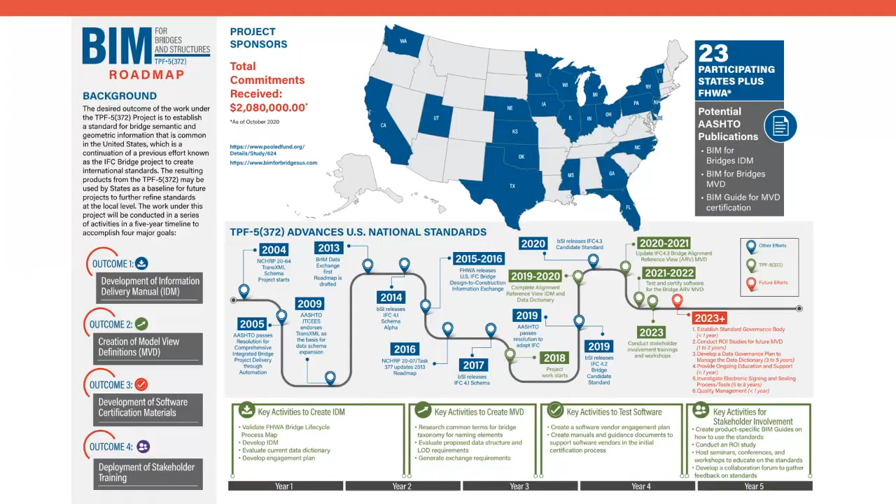Our goal for 2021 is to complete the Information Delivery Manual, IDM, and Model View Definition, MVD, for common bridges. Coordinate with the IFC 4.3 infra extension project, provide software vendors with testing materials, and finally begin the return on investment study. Next.

Working with AASHTO committees, we anticipate balloting the IDM and MVD for the design to construction exchange in 2022. I'm happy to say that we have been working with the National Steel Bridge Alliance, AASHTO Collaboration Group, TG15, to produce an IDM for the data exchange from design to fabrication.

That's the end of my presentation. Thank you.

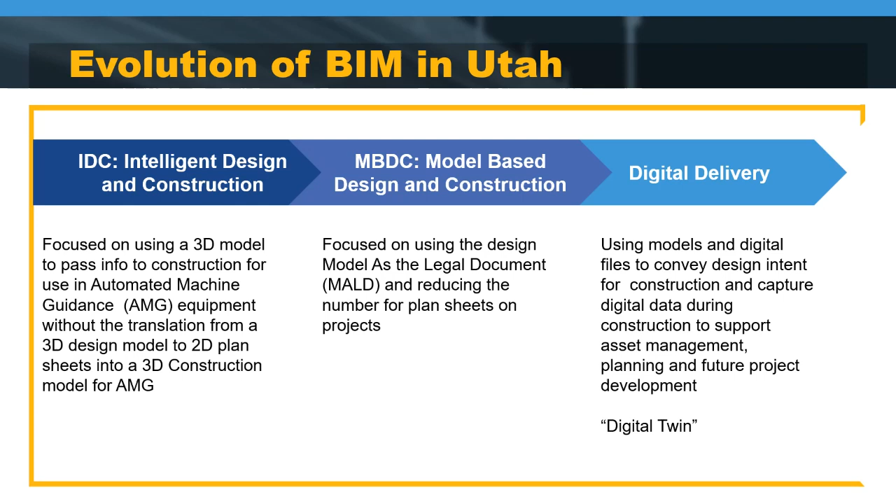To date, we have awarded 14 projects with the model as a legal document. 5 of those have been CMGC, where the contractor sits in on the pre-construction side to help us address the risk of the model being the legal document. 9 of them have been bid-build, and on all of those projects we're using rovers in the field and mobile devices for the civil features. 9 of those projects are fully constructed, and of those, 7 were awarded without cutting any sheets.

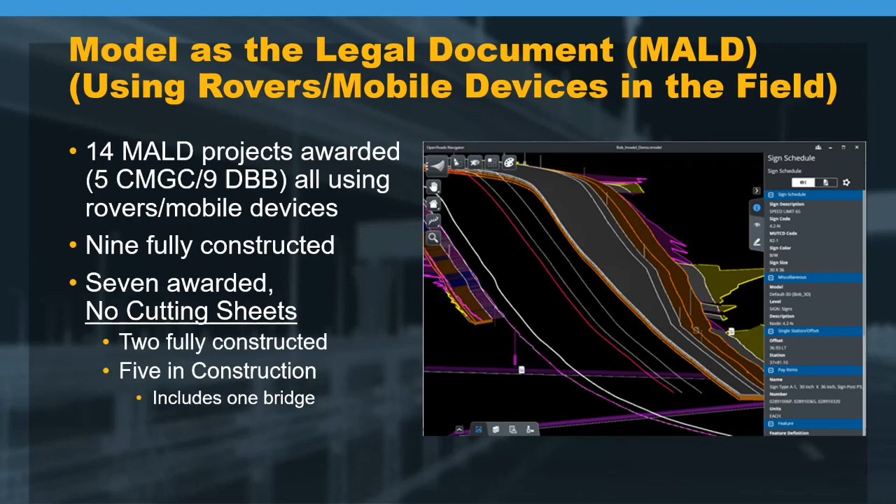So we're not putting out a plan set for the most part. 2 of those are fully constructed, and 5 are in construction right now as two-season projects.

We are trying, and I think we're right there, to build a repeatable process where we have a workspace for Open Roads Designer. We're adding metadata to signs, striping, guardrail, and barrier, and transferring information from design to construction. We're looking at having a consistent naming convention for everything. We've got links in individual assets that allow the person in the field to see the information, attachments, and standard attributes on almost all of our items now. We're doing CAD to GIS, with validation of our CAD standards and the ability to have a GIS workflow on every single project.

So we have an aid grant that we were awarded for $1 million, and on that grant we have a large team of consultants and contractors. We have Kimley-Horn, Horrocks, HDR, Avenue, Lochner, and Michael Baker, and on our contractor side, we've got Clyde and Wadsworth. We've got committees that consist of UDOT, internal consultants and contractors.

We've had a lot of vendor involvement, namely Bentley, Autodesk, Esri, Trimble, and Bluebeam. We have developed a model development standards manual that is out on our website. With EDC 6, we have a heavy involvement with digital as-builts.

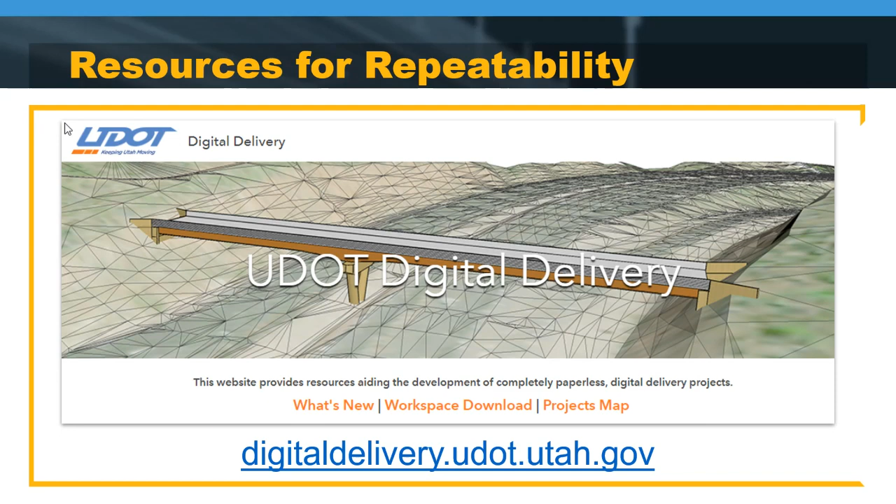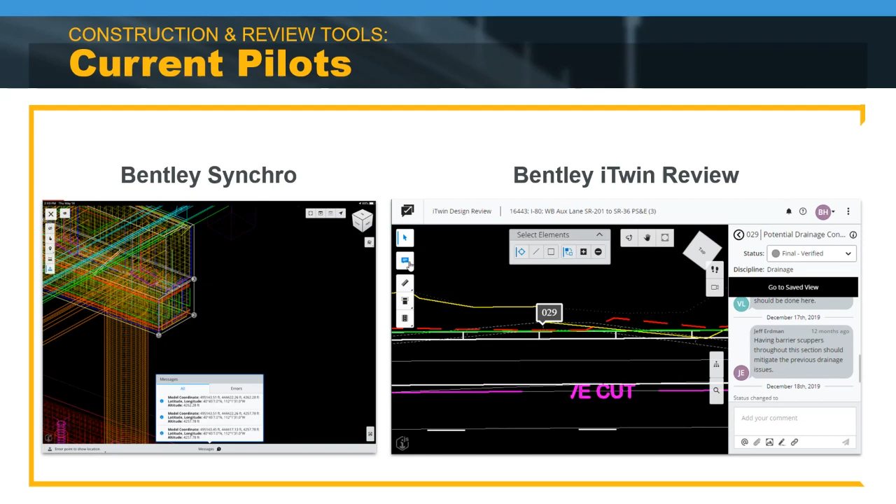So the vision for the future: we're essentially looking at tools in the second generation. Bentley Synchro is one of them, and it's live on a project right now. We're also using Bentley iTwin Review, for review at Plan in Hand and PS&E.

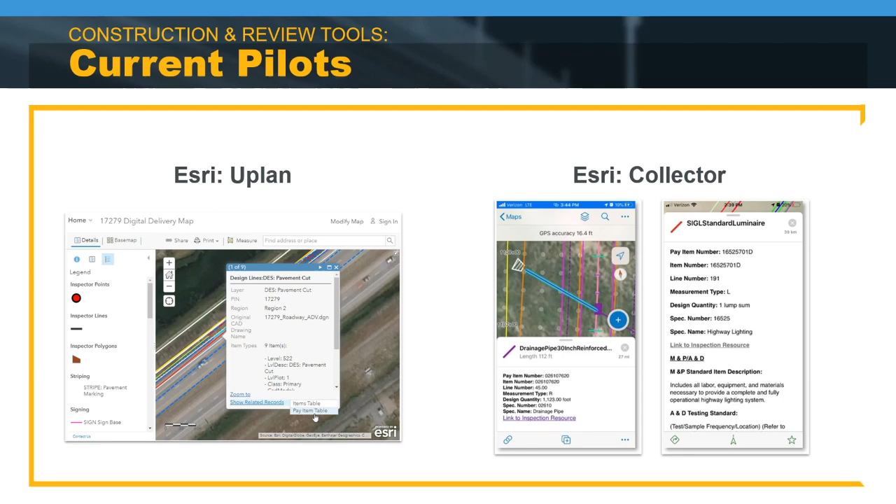We're using Esri products. These are screenshots of live projects that we're using in the field. We're using Collector to write information to our databases. It gives people in the field all the information they need.

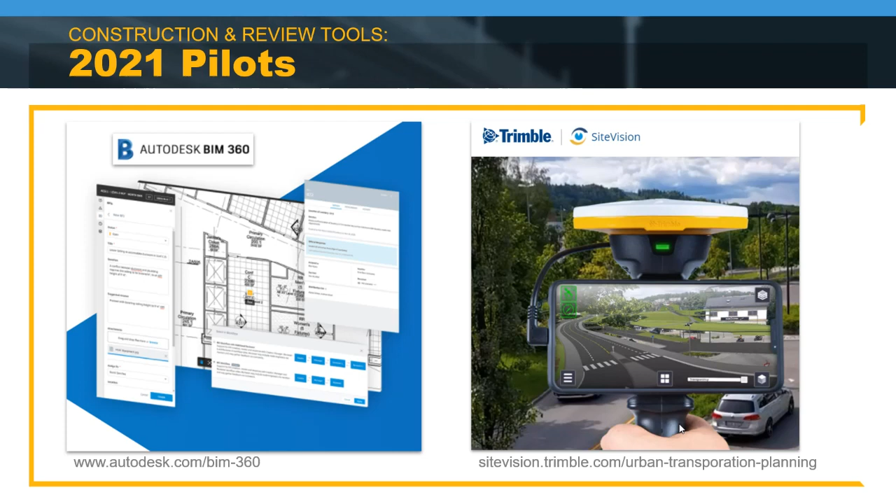We're also piloting Autodesk projects on their BIM 360 platform. We'd like to get to the point where it doesn't matter what you use, we just need the data flow, and that's what we are piloting right now with Autodesk. We're also piloting Trimble products, both their Site Vision and Quadri, and we expect to see those coming soon.

Our challenges are the tools are still in their infancy, even with the second generation. Our Esri products are not 3D and they don't meet all our needs. They're disconnected. Volume calculations are a struggle, and so is data integration. Our crews are not asking to go back to paper products, but they are saying that we're throwing a lot of tools at them, and it would be great if we just gave them one tool to work with. We're also concerned about the costs and licensing, so that's going to be an issue.

For more information, go to our website, digitaldelivery.udot.utah.gov. And from there, I'm going to hand that off to, I believe it's Ahmed.

Yeah, this is Ahmed Abu-Hawash again. In this segment of this webinar, I will discuss Iowa's perspective on digital delivery. As Mike mentioned earlier, Iowa DOT has a long history of providing digital models on highway construction projects.

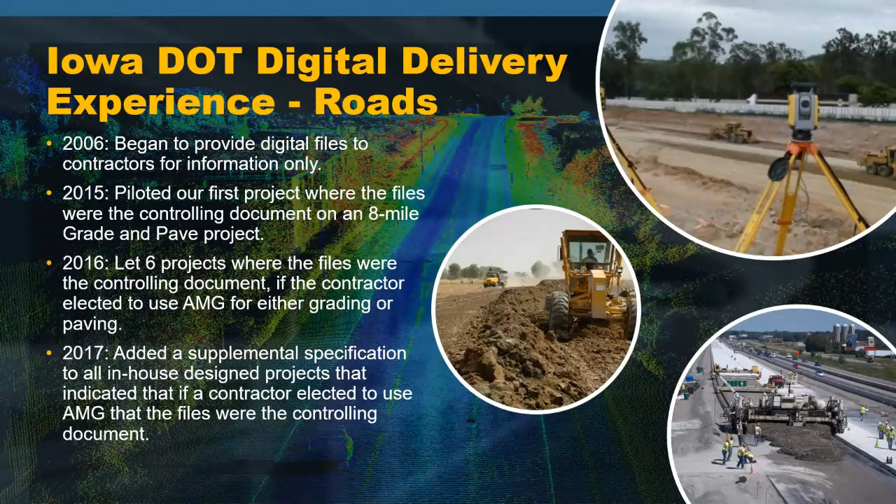As early as 2006, we provided contractors digital files for information only. In 2015, we piloted the first grade and pave project with digital files as the controlling document. In 2016, we let 6 more projects where we issued digital files as the controlling documents if the contractor chose to use automated machine guidance for either grading or paving. And in 2017, digital files became the controlling document on all in-house developed projects if AMG is used by the contractor.

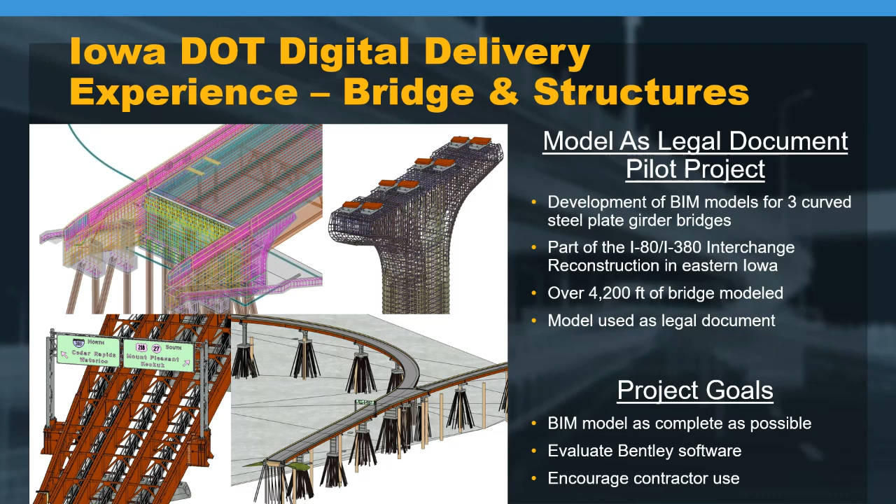On the bridges and structures side, we piloted our first BIM project with model as the legal document in 2018. The demonstration project is located at a major interchange in eastern Iowa. It included 3 curved steel bridges with a total length of 4,200 feet. Our goal was to develop the BIM model as complete as possible with the given software. We wanted to evaluate software and identify advantages and disadvantages of each, and also encourage contractors' use. We wanted contractors to become more familiar with the software, and provide feedback for future improvement.

For our first BIM project, our approach was to engage our local contractors early on. We met with our local AGC contractors on a regular basis, starting about 2 years before the letting. We had many discussions on how we would deploy the model. Initially, we thought about providing BIM models for information only and include traditional 2D plan sets. But our contractors suggested that we should require the use of the model and not provide 2D plan sets. The thinking was that if the model was provided for information only, its use would be very limited. So we decided on a hybrid approach: provide the model for all 3 bridges, but make it the legal document required on 1 bridge only.

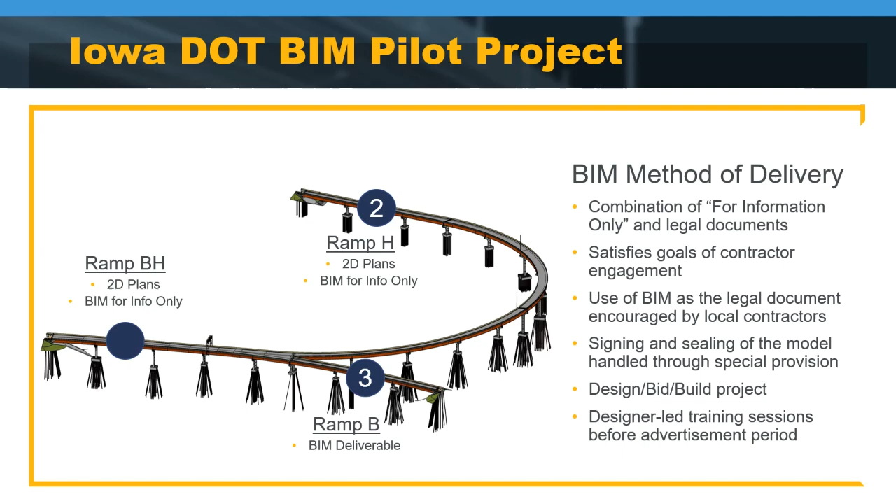Another feature of this pilot project is the training. With the contractors and the subs being unfamiliar with the software, we focused on providing training before and after the letting. We didn't want any contractor or sub being prevented from bidding. Training was provided to both DOT staff and potential bidders, and we recorded a 1-hour training video and posted it online.

Also, the software vendor agreed to provide free support. Some of the lessons learned from our pilot project: we heard from stakeholders that the model was used repeatedly for visualization. There were many software limitations. Although improvements have been made since, there's still significant development needed in the software to make digital deliverables a common practice for bridge construction.

Another area of concern is the contractor's experience and capability. At this time, only large contractors have the capability to make full use of the model due to limited staff experience and not having the proper hardware and software. The free software we provided to bidders has limited features, so contractors needed to invest in additional software to take full advantage of the model.

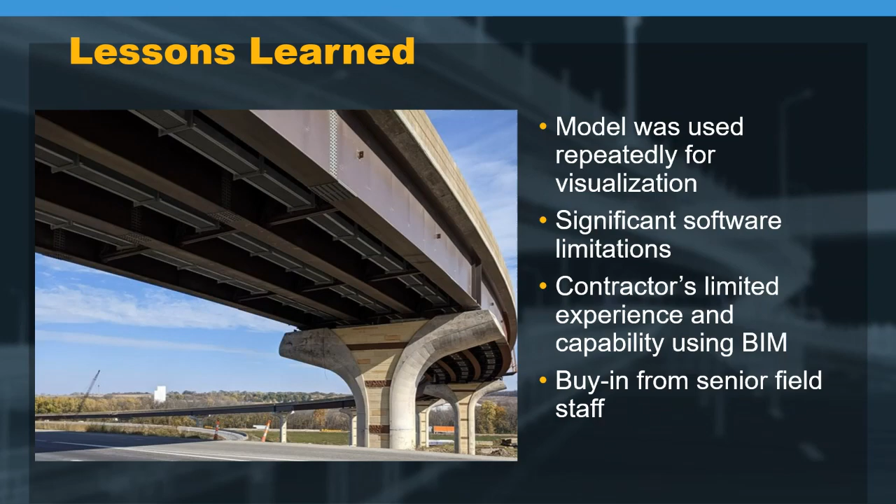Subcontractors and material suppliers are relying on the prime contractor to obtain information from the model. There were challenges with pulling certain information from the model. Field conditions made it difficult working with iPads and laptops in lieu of 2D plans. And lastly, it was tough getting buy-in from senior staff.

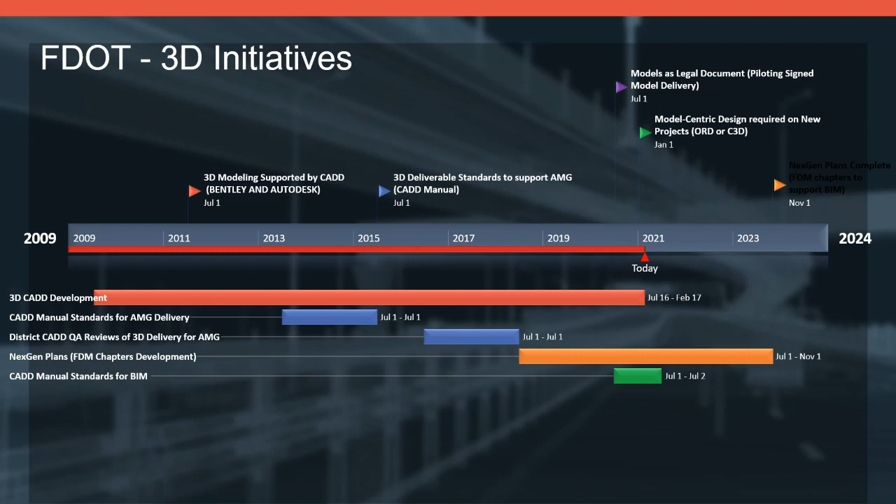And any other design software that might meet the CAD standards and requirements. Going forward, this year we're working on our CAD standards for BIM delivery as we develop those, and beyond 2021, more pilot projects are planned for BIM delivery and next-gen plans.

Next slide, please. We do have a lot of work to do. We're investigating, as George said, non-CAD tools to review project models. We're also looking at BIM 360, iTwin Design Review, Quadri, and the like. We're also developing BIM standards, currently working with AASHTO on the model element breakdown development, level of development standards.

We have an internal BIM technical advisory team. It's interdepartmental for developing our BIM maturity model going forward. We're developing an asset management workflow, CAD to GIS, similar to what Utah is doing. We're developing project scoping guidelines for BIM with BIM execution plan standards, and developing guidelines on projects where we'll use the model as a legal document.

What I like to call 'to BIM or not to BIM, that is the question.' We'll also be looking at developing digital as-built BIM standards and guidelines going forward. Next slide.

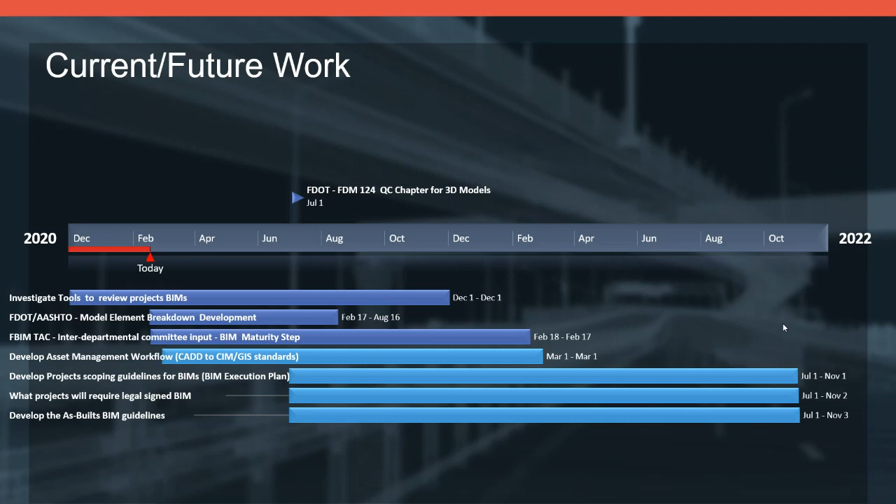What I would say here is we're involved in many of these different organizations, not just for our input but also for knowledge sharing. There's a lot of intelligent people. If you're not involved in these, I recommend that you try to get involved with them.

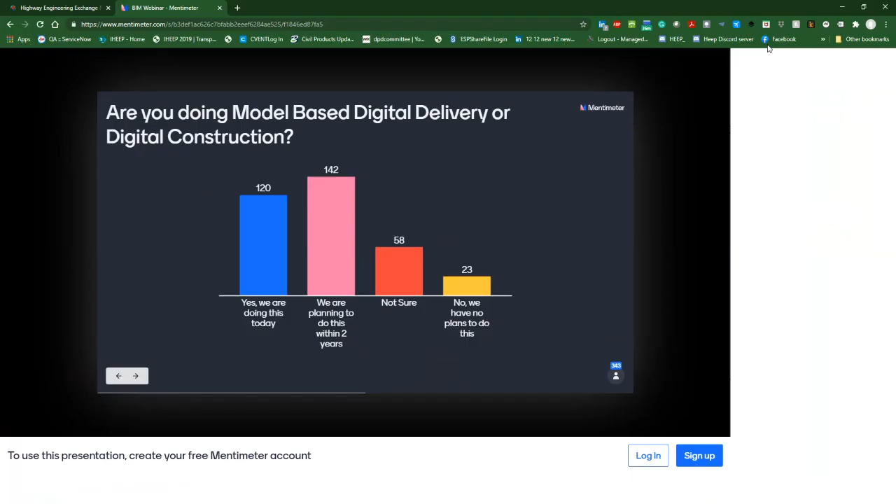But I think we did want to go back to some of the Menti polls. Was there anything we wanted to show, George? Yeah, the Menti poll, I think Randy just pulled that up. This will be good to kind of see where everyone wants the future of these webinars to look like. That'll be super helpful. And then participation, looking at who's in this. I guess that's what this one is, Randy, right?